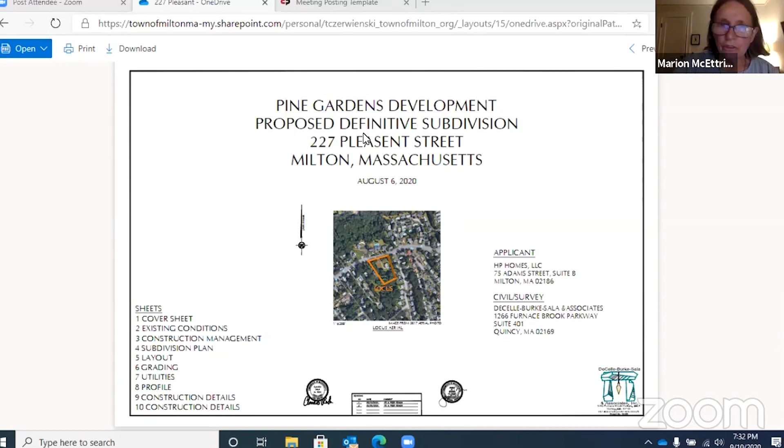So that was a very helpful summary, and it's been very helpful working with Tim Czerwienski since he came on board in August, going through some details for this project and trying to figure out how to address them and not have them left hanging at the hearing. I have to say, as an applicant's attorney, that was a really helpful process for me, so I appreciate that.

So this is a 5-lot subdivision proposal, 227 Pleasant Street. It's on a parcel of approximately 69,000 square feet in a Residence C district. There was a house and outbuildings on the parcel. We had to go to the Historic Commission to get permission to take the house down. They determined that it was not preferably preserved, although the age of the house was about 1920, and the same for the outbuildings. So we're working with a site that will be cleared of buildings.

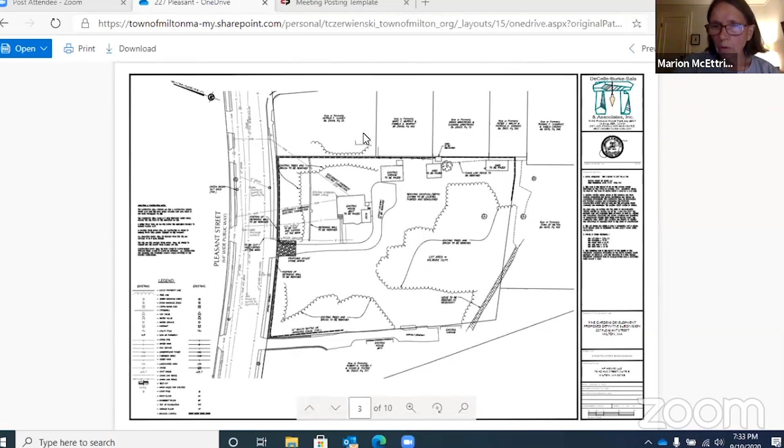We also, after our preliminary review in March, had recommendations from the planning board, recommendations from neighbors, and recommendations from the engineering department. So all of those recommendations have been incorporated into the plan that you're going to be looking at tonight. In addition, there was a peer review process for the stormwater management plan. That went on for quite a long time, it was very detailed. Changes were made, more excavations were done on the site. And at this point, with the work of the two engineers, I think it's a plan that you should feel some confidence in.

So what I have filed in August is the subdivision plan application with a narrative. My narrative explains what we have done to change this proposal since last March, as well as exhibits: the cut sheets, landscaping plans for each lot and for the perimeter of the development, an existing tree plan showing what trees are coming down. The town's tree advisory committee weighed in on the trees, even though it's not a public way, I asked them to look at the trees.

The final design for the one street light that we're proposing.

A document called a Declaration of Trust establishes the homeowners association that will manage the private way, the private sewer, and particularly the drainage system, because there will be a number of drainage structures that will have to be maintained on this site, and also the fencing around the exterior of the development.

I also filed a construction management plan that had been edited and improved since March. There had been some suggestions or recommendations from the planning board, and we incorporated those. And then of course, the 10-page site plan that you're looking at right now.

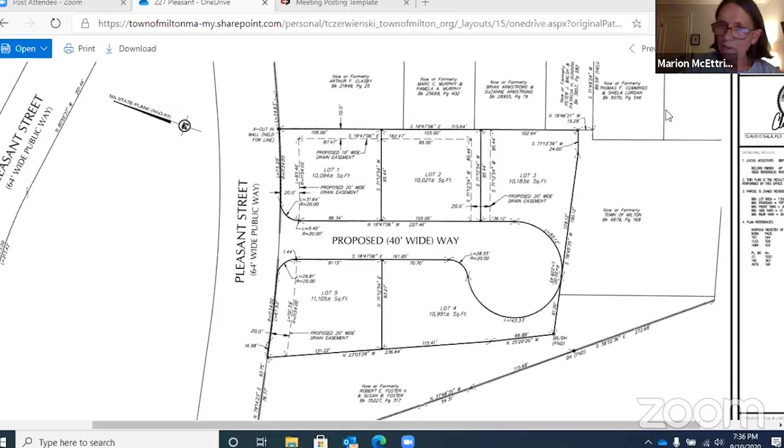Lot layout, roadway, and sidewalk dimensions so far remain unchanged. There are still 5 lots, each about 10,000 square feet, and there's a short private way, which you can see on this plan, ending in a cul-de-sac. There's a sidewalk on one side. We decided to terminate it before the cul-de-sac after the preliminary review.

That was basically to eliminate additional impervious surface that was deemed not necessary. We did explain at the preliminary hearing that lots in the front corners would use house designs with porches and other design features, so there would be an interesting view of each house from the street. Houses will be built individually for individual buyers by this developer, so they could be a variety of designs, and I'll be addressing that a bit later when we talk about energy efficiency as well.

We did modify site grading in order to allow the retaining walls to be lower. And we have plans to use all of the existing granite on the site. It's still there, you can see it in piles if you drive by. That will be used in the retaining walls and could be used in the houses as well.

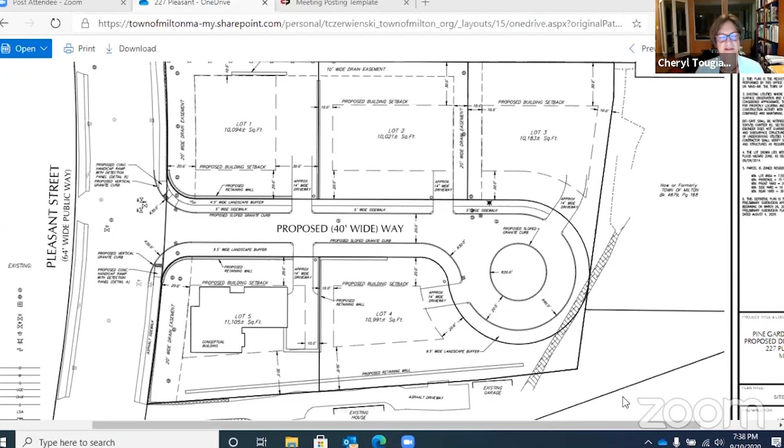From the perimeter of this development, the retaining walls will not be visible; they'll be at grade. From inside the lots, they will be visible, and the landscaping in the back of the lots will set off the walls. But they're going to be of natural stone and granite, and they will be attractive. They have also been moved back from the lot line so there isn't any chance that construction of the retaining walls will interfere with root structures in adjacent properties. That's something the planning board asked us to do.

Tim, can you advance that plan to the grading plan? I think it might be next.

So, Marion, there's still a lot of retaining wall here, so there's a very small amount of reduction, is that correct? Yeah, we didn't take away retaining walls, we moved them back from the lot lines. We had already designed this so that retaining walls from adjacent properties would not be visible, so they're not sticking up in the air as you look at this development. This isn't one of those developments where you drive by and see a huge concrete or stone wall that wasn't there before. But we did move them back because there was concern that the work on the wall might interfere with root structures in neighboring properties.

As far as the grading adjustments that may have been made, I would ask the engineer to address that, as I don't really have a detailed ability.

I don't have the ability to describe that well in summary, he might be better at doing that. If you want him to do that now, or no, I think I do have comments and discussion I'd like to do with the grading plan, but I think it would be best after you go through all of your comments. Okay, thank you.

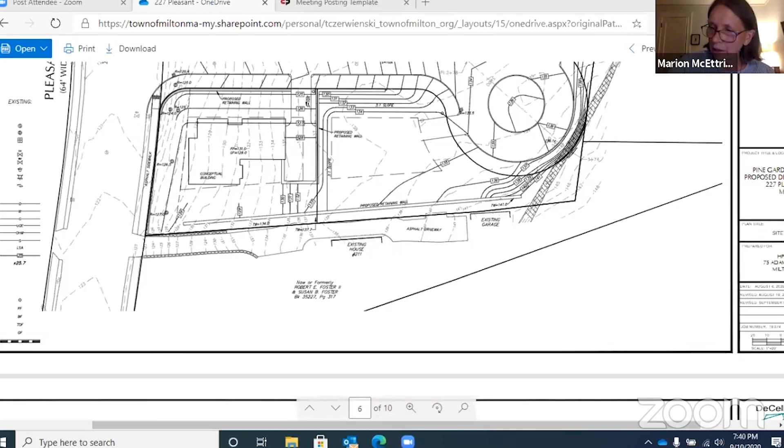As I said, I did have TAC look at the street trees. They were very happy with them, didn't have any problem. They told me that the street trees on Pleasant Street were kind of straggly looking, since it's a narrow tree lawn. So they've told us they'll see if there are any better trees that could be installed there, and they might come back and make a request to the developer. We'd be happy to hear that if they do come back and do that.

There is one street light proposed for this development, between lots 4 and 5, on the street between the two lots. I think it's at a 14-foot height. I provided specifications for the light, and the fixture itself, the bulb, is going to be the same fixture that the town uses in its street lights, which is highly energy efficient. Once it's installed, it probably won't have to be replaced for as much as 20 years. The design is in the exhibits. If anyone is interested in that, we can bring it up.

I want to talk a little bit about energy efficiency and energy sources, because a question was asked about that at the hearing in March. This development will be served by electric lines and by a gas line, but each lot is going to be developed for an individual owner. That's one of the features of a development that is considered potentially more energy efficient, simply because a developer can design the house as the owner wants it.

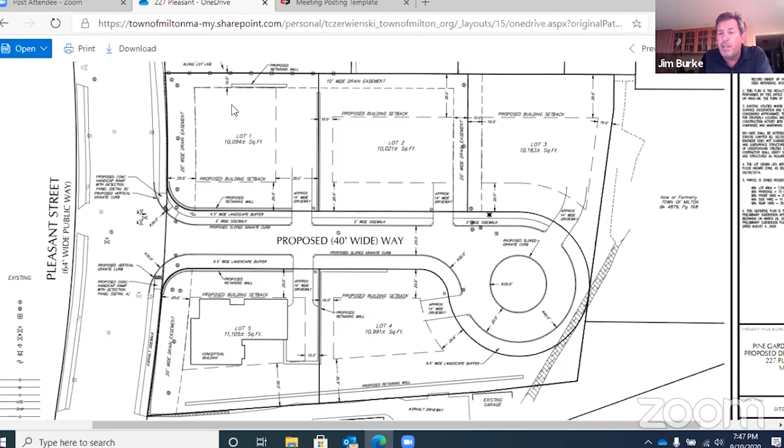So that's a quick summary of the changes we incorporated into our final definitive subdivision application. If Jim Burke is interested - I don't know, you may have questions for me - but then I would ask that Jim Burke discuss the drainage plan. Why don't we have Jim speak about the drainage plan, and then we can go to the board for all questions. All right, this is Jim Burke.

Can you hear me okay? Yes, thank you. Good evening, everyone. I'll be brief. The stormwater management system really hasn't changed that much since the last time you saw it. There was some great input from Jeff Kane, the peer review engineer, that tightened this whole thing up.

The drainage consists of catch basins - there'll be 4 catch basins collecting the runoff for the development and conveying it to 3 separate water quality tanks, Downstream Defenders, to assist in removing total suspended solids and meeting the water quality requirements in the Massachusetts stormwater standards. To buffer the peak flows, we have 3 underground detention tanks that are pretty significant in size: 10 feet wide, 6 feet deep, with one 90 feet long and two others 76 feet long. The treated stormwater will flow into those tanks and be released to a water control structure down at, I believe, the easterly corner of the development, releasing the runoff to Pleasant Street with a reduction in flow from the site and improved water quality standards provided by the deep sump structures.

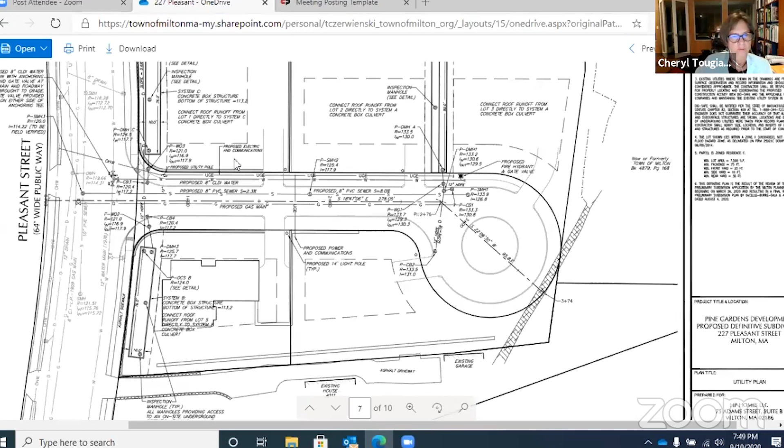Thank you. So if that concludes the presentation, I think I'd like to open it up to the board. Everybody should be - all of the board members are unmuted unless you have yourself muted. So I don't know who would like to kick us off. Cheryl, do you want to kick us off? I think you said you had some questions already baked.

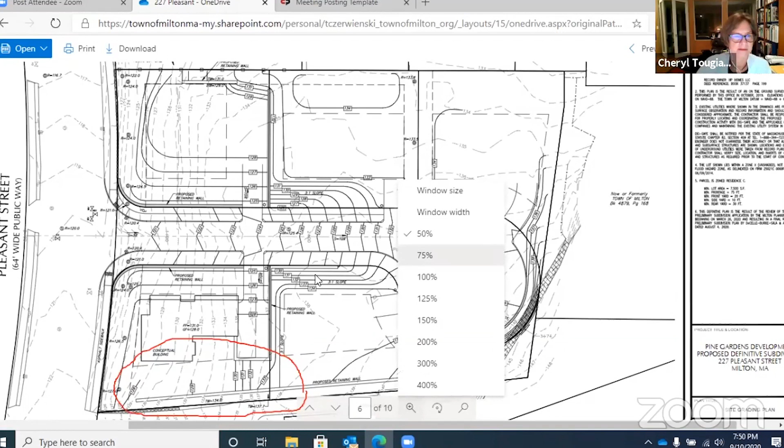Right, yeah. If you could go to the grading plan. No, okay, all right, so I'm going to just talk about the grading a little bit. If we could, Tim, zoom into this section, please.

Cheryl, the Zoom is not as intuitive as I would like it to be. Am I in the right ballpark? Yeah, that's fine.

I wanted to talk a little bit about what's happening with the grading plan here, and how we provided some feedback back in March about whether the grading could be looked at differently. The property slopes up from Pleasant Street pretty steeply in front, then less steeply here. I understand the grading for roadways needs to work according to standards, and there's a waiver for this section, which is steeper.

What's happening here is this grade of like 128 is gradually going up, but right here it's getting pushed back. So from here to here, that grade is getting cut back to make this fairly level. And what that does is necessitate this retaining wall, which I think is necessitated by the roadway. And then we have another retaining wall here.

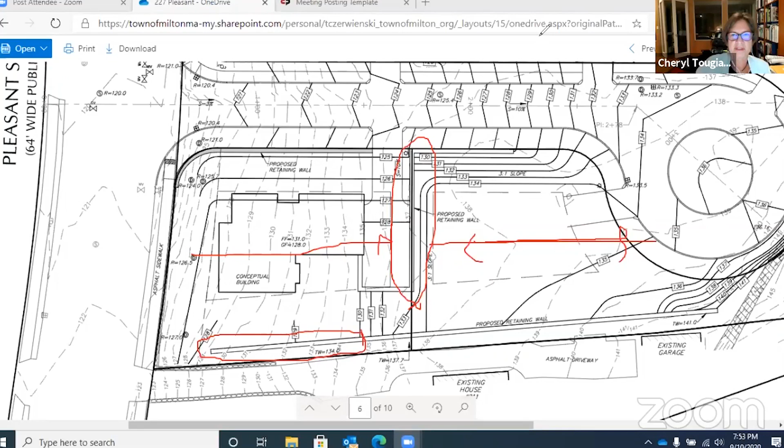It seems a very aggressive topographic change to me. We have a subdivision we approved a few years ago on Highland, where this also has some topographic change, and the new houses and grading there have sort of blended in. I'm feeling like this is going to look like somebody came in and terraced this property, put these walls in, and look very unnatural. I expressed these concerns back in March, and I don't really see any change to that in what's proposed here.

If you could scroll up towards the top now, Tim, to the other side of the road. Again, the retaining wall here, the flat pad, the retaining wall here, the flat pad. So we have this terrace look now when we're looking up the street from Pleasant. It's unlike anything else I can think of along Pleasant Street or perhaps other places in Milton.

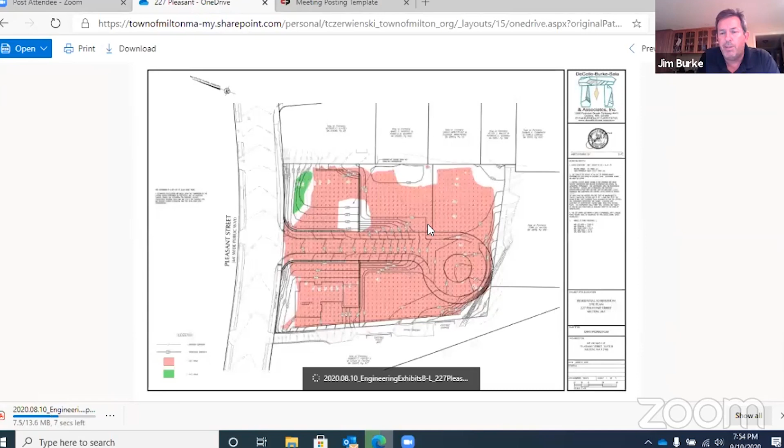I think part of it is probably required, but I don't think all of it's required. So I'd like Jim to talk about that. Also, the cut and fill plan that we were provided was pretty small, and I'd like that plan to be called up and Jim to address it relative to my comments here with these retaining walls.

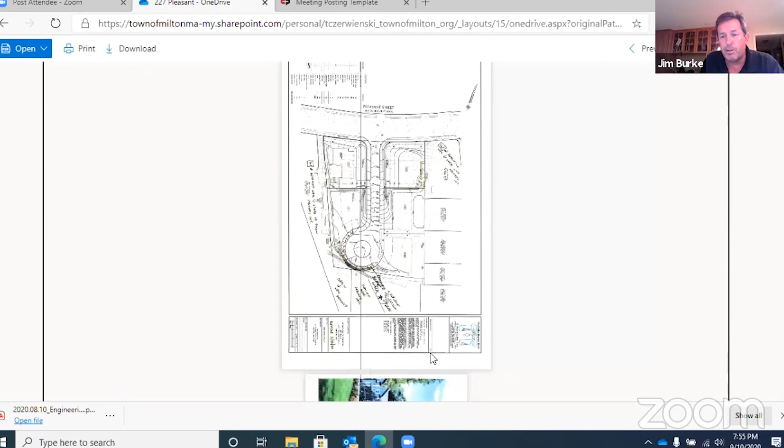I guess you're right, Cheryl, with regards to the retaining walls and what they represent. As the street is cut into that slope, there's really not much we can do with those, since we're asking for waivers to go from 3 to 10. And they're not huge - I believe they're like 4 feet at the highest, for those retaining walls to allow the street to be constructed.

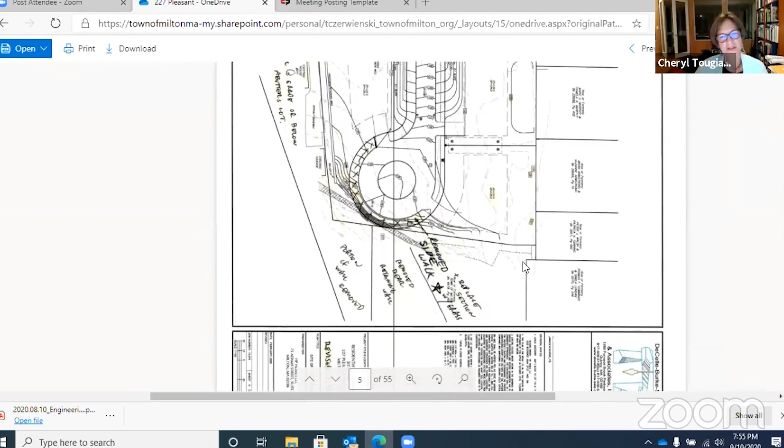As far as the internal retaining walls that provide the platforms for each individual lot, it's really kind of a factor of the architectural homes being proposed for the lot, with the porches and the like. The garages are real close to the same elevation as the finished floor. Once you establish a flat elevation for a single family home, it really kind of dictates what the topography for that particular lot needs to be.

Jim, can I interrupt you on that point for a second, please? Sure. We spent a lot of time on this board reviewing the plans for Wolcott Woods, and on that property there's extensive topographic change. We do have retaining walls there, but they don't have this kind of terrace look because they're not making these flat platforms. They're using the topography also, and the architecture can work with the topography - it doesn't require it to be flat.

I just want to point out that it's not necessary to make it flat in order to have the architecture work. It's a different style of architecture. If the homes were graded differently, you could have more exposed massing on the front along Pleasant Street, blending into the grade. So you'd have a lower grade along Pleasant Street and a higher grade further back into the lot, giving more exposure to meet the grade.

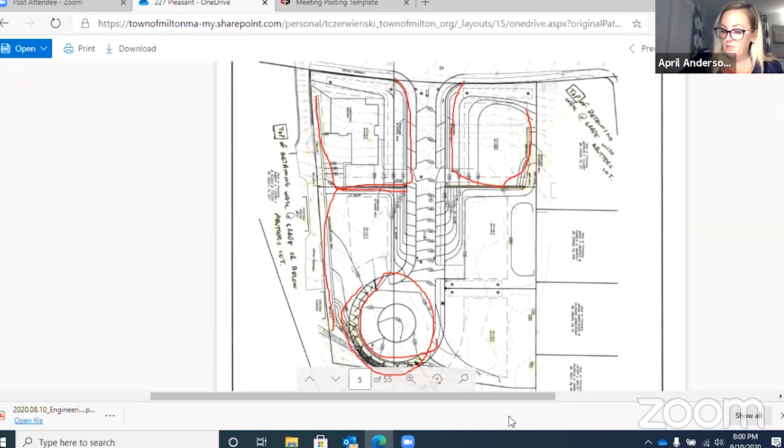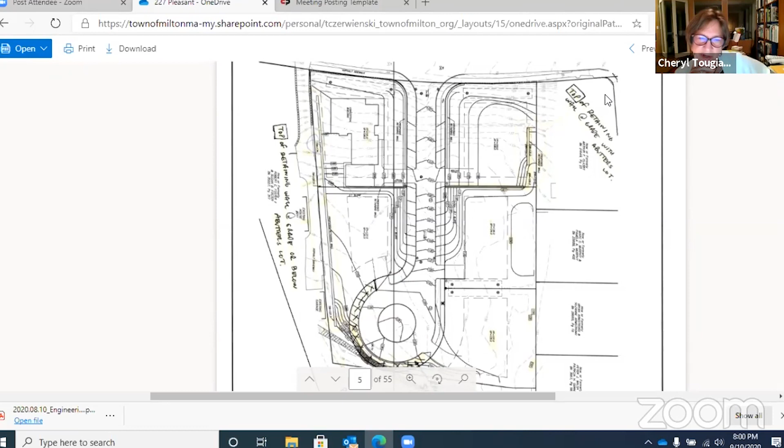No, but I think if there were a 3-dimensional drawing, when you're coming along here seeing wall like that, it's just a very different kind of look than building things into the landscape. And this is cut in as well—there's all of this cut in here, and this is a very big circle. So there are design choices made here that I call aggressive, because they're big changes to the topography, to the lay of the land.

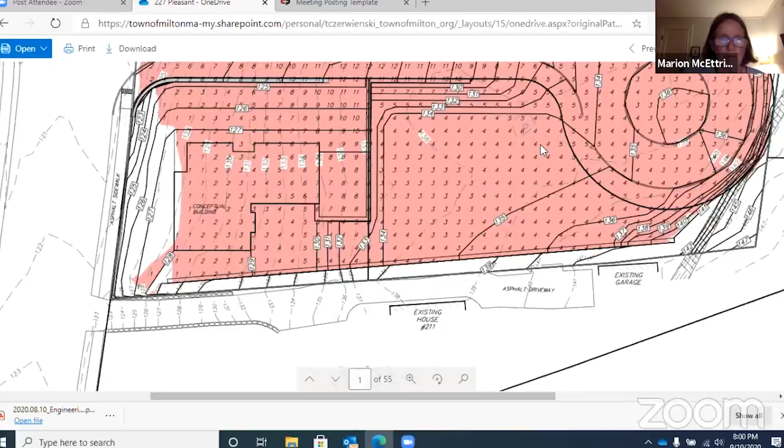And it doesn't have to be that way—you can still have 5 lots to build 5 houses on and put the road in, and that would be more visually consistent with the neighborhood. That's what concerns me. I understand that part, yeah. Okay, thank you. Not that I'm working on the design myself, but I understand what you're talking about.

I think if you, Tim, could pull up that cut fill analysis, I'd like to have Jim point out to us, because that might help demonstrate what I'm pointing out on the grading plan. Marion, do you recall what page that's on in the exhibits? It's probably the second exhibit, before the landscaping, back before the trees—one of the first drawings. There we go, okay.

So Jim, if I understand that plan correctly, those numbers indicate how much soil is being removed. Correct—the red represents the cut, there's 8,500 yards coming off this site. So if we talk about cut fill balance, there is none—it's all cut and no fill, and that's my point too. You drive down the street and you're going to see somebody cut a rectangle out here and put houses in, instead of finding a way to put 5 houses in that works with the landscape.

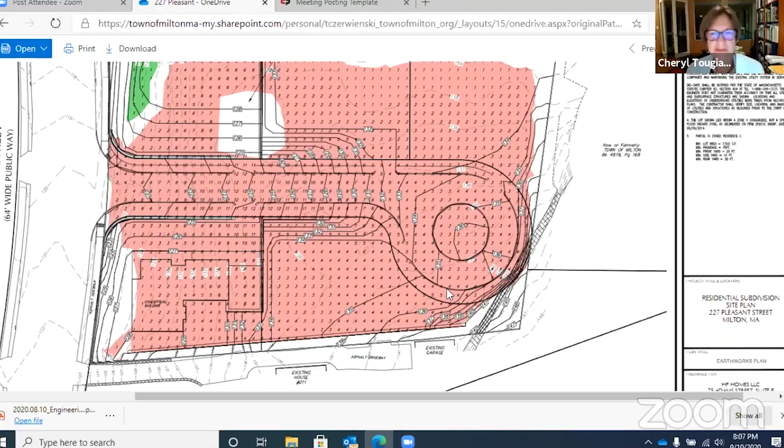Well, rather than try to design it now, I would really like for you to take a better stab at doing what I requested back in March and what I'm requesting again tonight, which is not such an aggressive terrace look to this site.

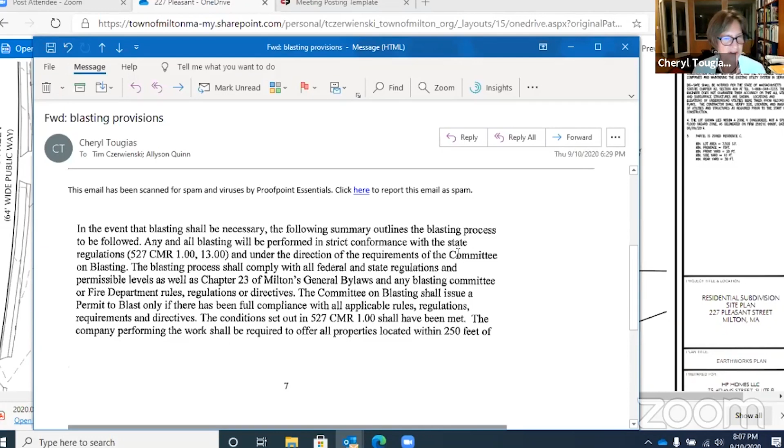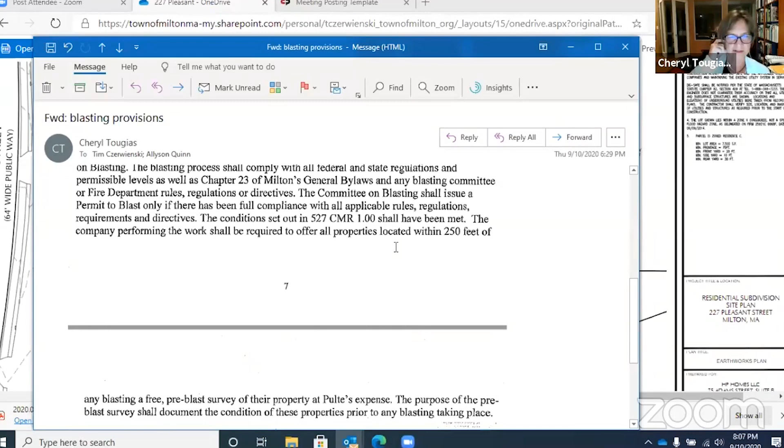The lots themselves are 10,000 square feet, not a significant size. So as soon as you put a house on this particular lot, what you're asking is that the foundation acts as retaining walls for the slope, for the existing grade of the parcel, which can be done—it's just a different style of design, and I can certainly provide that.

Well, that's one of five people on this board's opinion. We can see what others think, but I do have some pretty serious concerns about what this might look like.

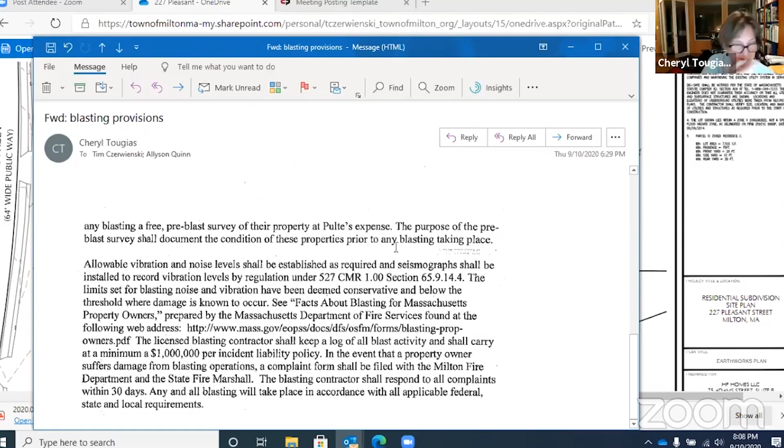Hey, Cheryl, do you have other questions or comments? Just on a totally different level of discussion would be the construction management plan. There's nothing in it related to blasting.

When we did the Pulte construction management plan, we had a couple of paragraphs related to blasting, and I snipped those and sent them to Tim and Allyson, which looks like they've got here. I would just like for Marion and the team to take a look at that and consider some revisions picking up on some of those things. They had a lot of rock up there.

And there's this section and another section too, if you scroll. The town has a blasting bylaw, and that should be referenced. Did you reference that in your construction management plan? There's no mention of blasting at all in this construction management plan.

I think it's fine to put it in, I'm just asking whether we can put the town's reference in as well. Yeah, it's here, if you scroll back up a little bit, it does reference the town's chapter 23. But it also references state law.

I think it's important to put it there, because it's the place that the people doing the work will be looking, rather than thinking 'oh yeah, there's a state law I should have thought about' when I did that work. It should be in there. Okay, so April, those were my two thoughts, a couple of thoughts from Tim.

So then my larger question goes back to this grading issue - I thought I heard you say that houses are only going to be built as they are sold. So depending on what happens, that could be several years down the line before you finally finish all 5 houses. Right, so there's nothing in this that says these houses have to be designed the way you have proposed.

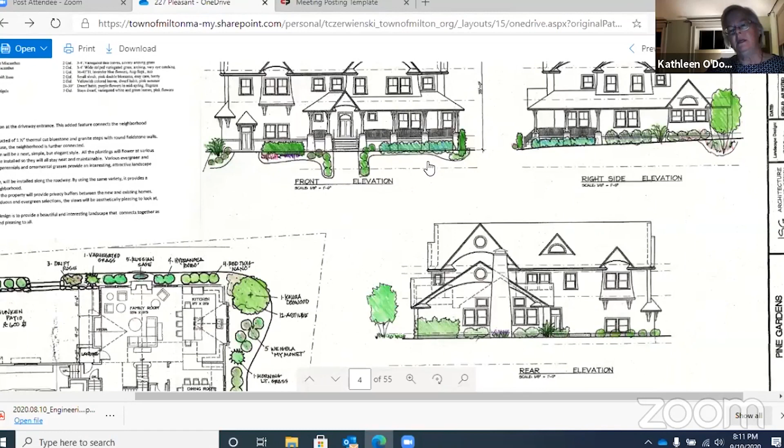Is the idea that you're going to grade every site and have it construction ready, or are you only going to do the grading as you sell a house? Well, first of all, this developer is building the houses. He's building them with features as requested by buyers, but he has an architect. He's not selling the lots to a new owner who then goes out and gets their own architect and designs their own house. That isn't what's happening here.

But in terms of how much preparation each lot would take, I would appreciate it if Kyle Harnish, or the engineer, would address that, because I don't know exactly what the order is, but I would assume the lots are prepared to be ready to build a house, and then they're ready to sell or put under agreement with the buyer according to the plan they agree will be built.

Well, it's sort of going back to this whole grading issue where you're moving dirt all over the place, holding onto rocks and not holding onto rocks and all that sort of stuff. If it's all going to be happening pretty quickly, or you build one house and then the market takes a dive and it takes 5 more years before you build house number 2 - I can't believe you would have spent the money to build the entire roadway, the cul-de-sac, the sidewalk, and graded all those sites for stuff that you haven't sold yet.

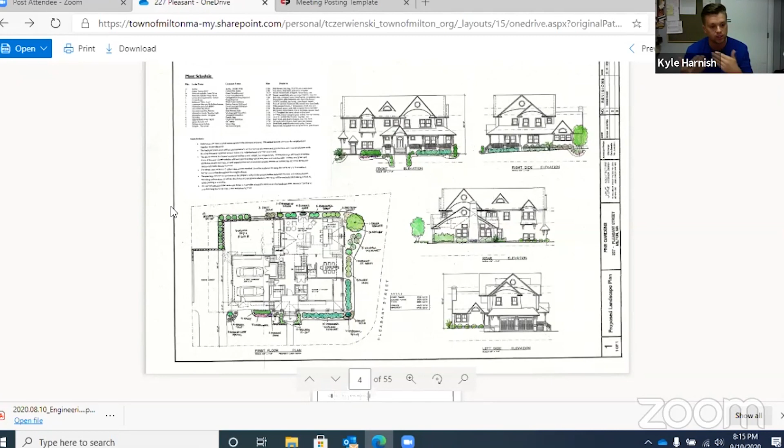So I think what Marion was trying to explain is that we are going to give an option, as we move through the project, for clients to secure with me a design build package, and I can add some modifications to the specific house. I have two or three designs in mind for how I've been planning to do this development, and it's a matter of financial decision for myself and what makes most sense. But my intention is to start with the road, which I have to do, and I have to address all the drainage, bring the utility lines, do everything associated with the lot.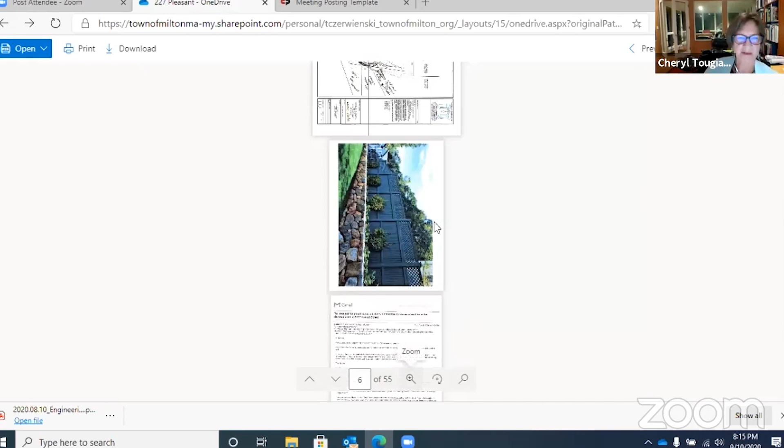And I'm going to start initially on the first house. I can go ahead and build all five houses if that's what I decide to do at that point financially, but I do have the option to perhaps pre-construction sell some of these houses so clients can have some input on finishes. I don't intend to get into the process of letting each client individually design their home completely. I am going to give them a set of standards for which we can work in. So that's kind of my direction on how I want to go about this. Thank you.

April, I just like one other thing, if you don't mind, that I mentioned, but I would just like some follow-up on, and that's that question of the code requirement on the guardrail for those retaining walls. I'd like the design team to come back and let us know whether, in fact, what I suspect would be required there would be.

So our intention, I can speak on at least on the side lots that go all the way up that separate our property from the folks on Pleasant Street and the folks on Dean Road. The intention there was to put a fence around the entire perimeter of the property. So that would sit on top of the retaining wall. I believe there's an image of it somewhere, a sketch or an image of what we were proposing.

In between the lots that you're saying would need or require a guardrail, I would likely do something similar in a fence style, perhaps a stockade fence or something sufficient for the code requirement. So can those fences be added to the plan? The extent of the fences and their locations, can that be added to the plan?

I pressed very hard to get the grass in well over a year ago. And Tim is going to show you a couple of slides just to bring you up to speed on where we are. First visit, December of '17.

When we first met on this site, we realized that the storm drainage was going off in a bunch of different directions. Those little blue hen scratchings there, it was going up to the upper left, it was going to the upper right, literally flowing down. The plan wasn't working, and through what I understand was a rather lengthy court battle that I had nothing to do with, I guess they gave me the honor of helping you solve this problem.

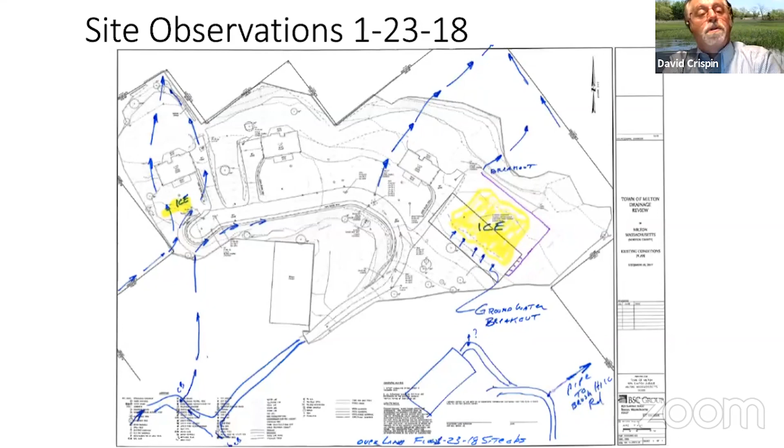So we worked pretty diligently with their engineer, Fred Geisel, and guided him through what we thought would be a reasonable solution. And the next sketch, and these have been in the archives for a little while. If you want to flip to the next one, Tim.

He's quick with the trigger. Can you back up, Tim? There we are. This was, and I don't want you to pay a lot of attention to the details, but this was what we suggested to their engineer, and there was a whole bunch of dig here, move here, fix this, do that. And lo and behold, they finally put a plan together.

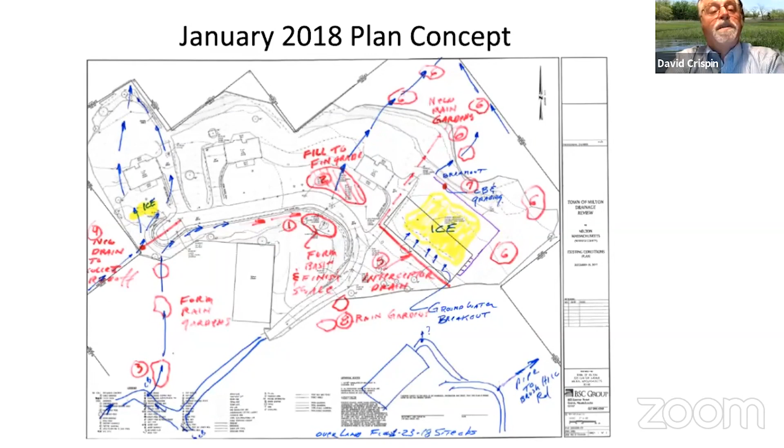We all agreed on a plan. This was close to 2 years ago, and they've implemented the plan. And the good news is I haven't heard any complaints or seen water flowing basically off the site in well over a year. And I know we've had some very good rainstorms.

That being said, give me the next slide for a second. And I've only got 8 pictures here for you, so I'm not going to hammer you. We made a number of requests. Japanese knotweed is all over the place. We suggested that they do an invasive species management plan. We have not seen that.

If this board tells me to drop that issue, we can drop that issue, but I believe it's going to be important, at least to the condo owners, when the developer walks away, because Japanese knotweed, even today, I did walk the site, is popping up everywhere.

Wow, that's not good. May I ask a question, Mr. Crispin? Sure. Is that going to impact the stormwater system? I do not believe it will. And that's why I'm saying if the board says this is not important, then this is not important. But watching this get built, I'll show you a picture at the end of why I think part of this is important.

Okay, we've been asking for an as-built plan. Part of this meeting has resulted in one positive thing. I've gotten a call from the developer. I've gotten a call from the developer's engineer. I've got a copy of an as-built plan today. I've got a response to my letter that I've been waiting for well over 6 months for.

So I think I'm at the point where I can say, okay, let's meet on site and walk this thing through and wrap this up. We're not, they're at the second and goal, as far as if I was to use a football term. They're really close here.

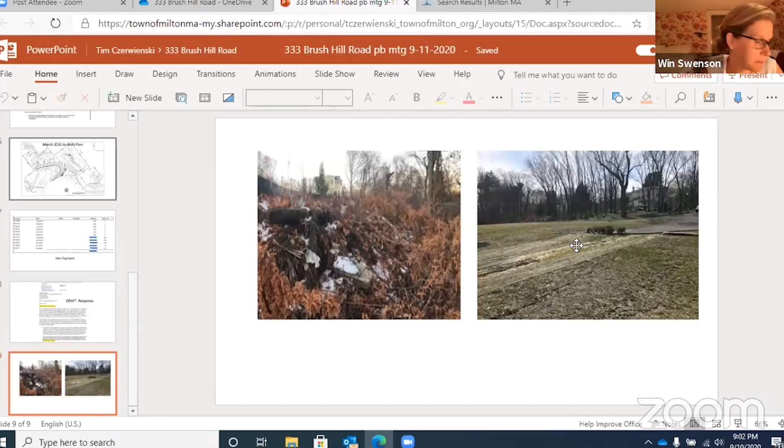Anybody else have any comments on this? Yes, Debbie. I see the document that showed the tree plan. I spent a significant amount of time walking the site with all the different parties, and I just wanted to get an update on the trees.

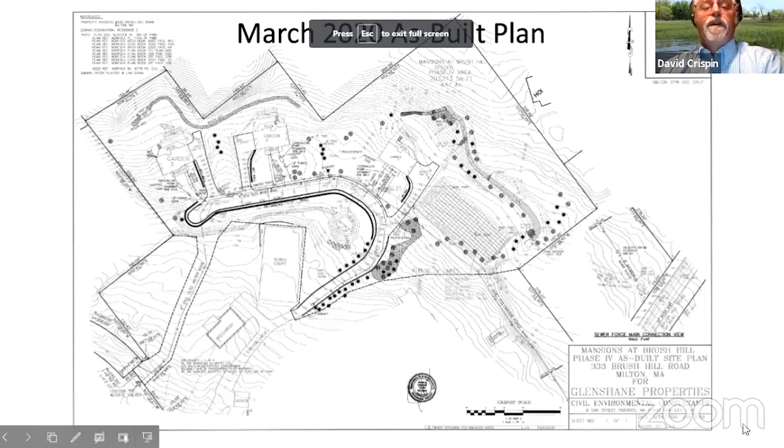Yeah, this is the as-built plan that they put together last March. It took a couple of months to get to me because it came through the building inspector's office. But they didn't identify species. I'm not sure they actually surveyed these locations or just sketched them on there. At that point, I was basically shutting down for non-payment, so I was reluctant to send my landscape architect out there to verify species and size and all of that.

Yeah, as I recall, there were going to be some more trees to the back left. And over to the right, I was concerned about some trees dying. They looked like they were going to die. So we had a plan that the developer would have to replace those before they left if they did in fact die. I can tell you they did die, and I don't know if they've been replaced one for one at this point or not.

Mr. Crispin, did your comments mean to imply that you do intend to send a landscape architect out at some point in the future? I think as soon as we're confident that payment's going to be made, yes. Okay, so Denny, would you want to join? Sure, yeah, I would like to do that.

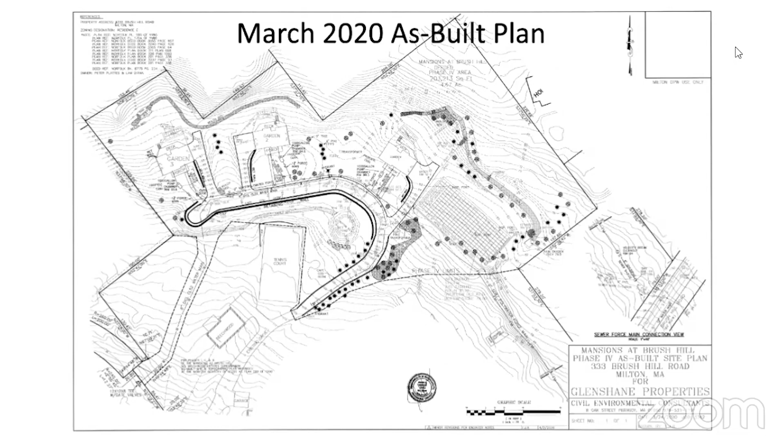There were many things about the plan as they were implementing it that were different. So the design that had been approved, and the stormwater that had been peer reviewed, was no longer going to work because of these changes and the fact that it had been clear cut, and we had been very specific about not clear cutting it. So it had to have a redesign, and Mr. Crispin assisted, and some of his earlier slides showed his analysis. The planning board really got involved in this because the neighbors alerted us to the fact that this disagreement between the parties was having significant impact on them. The board worked quite extensively to help come to some kind of solution that would move this along. And that's where the settlement agreement, the modified approval, came from.

Thank you very much, Cheryl, that's exactly what I was looking for. My primary concern here is getting Dave paid, so I just want to have all the information there. I was on the board when this came to us for approval of those three.

And so I too, like Denny, have been frustrated over the last several years because I raised the issues like I have been all along on grading, on limits of work, on not having trees removed. And that's why I think Denny and I both harp on these things on every application, because we've seen what happens if it's just left and not done properly. You can't assume that it's going to be done properly.

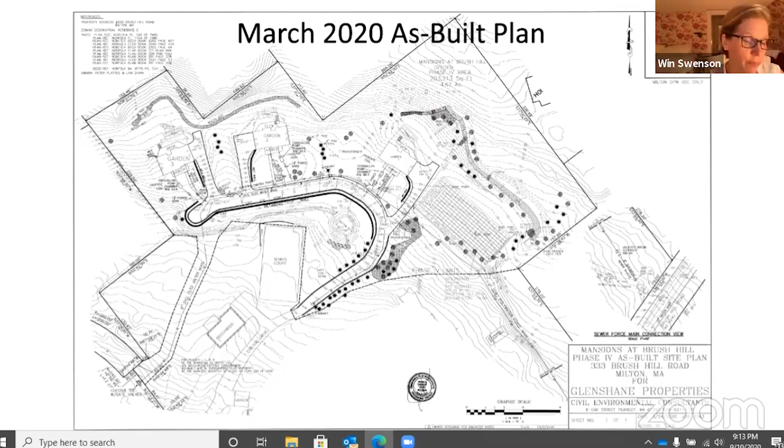If I could add to that, they didn't just move one of the buildings slightly. They moved it something like 50 feet, and, thanks to Dave Crispin, who was able to impressively look over Google Earth shots of trees, we assessed that they took out something like 50 trees outside of the tree management plan. And it's amazing the impact that those two things had on the stormwater system, making it practically useless for the neighbors behind the two properties in the back there.

But oh my goodness, we learned a lot on this project about the value of trees and vegetation. When you clear cut a property like this, it has incredibly bad effects on the abutters' water issues. And even adding to that, Dan, I think we learned a lot about process, and that's why we're going through these process improvements, engaging every department head in advance of every application, and getting all the comments either in writing directly from them, or memorializing them in these memos, so that we have something to look back on, because in this particular application, we didn't have a lot of background information on what the discussion was or what had taken place.

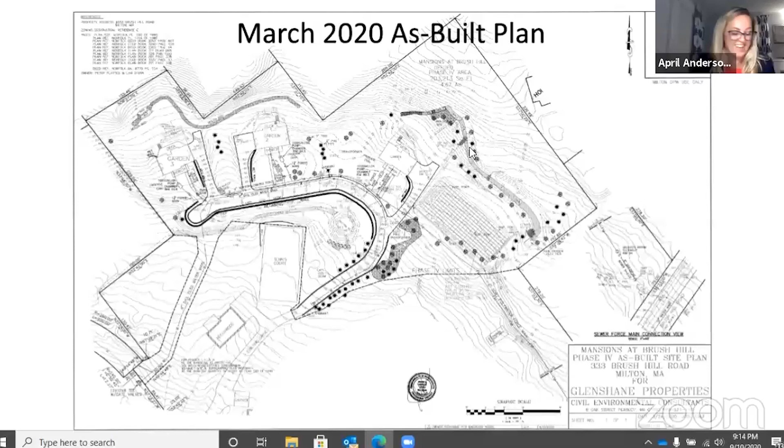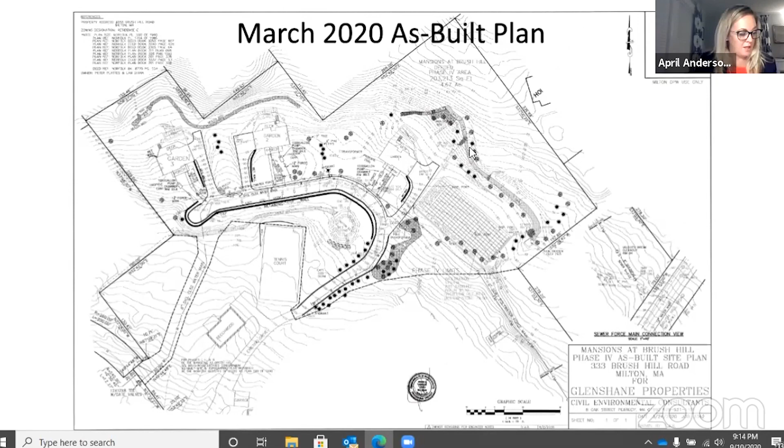So I think it's informed our process too. It was a traumatic experience, probably the most traumatic experience for me, so that's why I'm so thankful to Mr. Crispin for stepping in for us. That's why I'm adamant to see that you get compensated for your time and efforts on our behalf, and that all of your recommendations be implemented, because until you joined our team, we were making no progress. So we very much value your input, and we thank you on behalf of the abutters, the community at large, the condo association, and everybody else you've been helping. Thank you very much.

I hate to make light of this, but did you ever hear about the guy who asked, why are you pulling that rope? The question is, do you ever try pushing one? That's what this job has been like. I hope that doesn't mean you'll never work with us again.

Now, in the interest of time, thank you very much. We're going to move on to Walcott Woods, the de minimis change request. Tim, if you would please prep us for this discussion.

Yeah, so again, thank you, Dave. If Dave is still here, I think I might be gone - I'll touch base with him on Monday and figure out what our next step is there. Sorry, I'm trying to get out of full screen mode over here.

So we had gotten a request from Northland Development, the developer of the Walcott Woods project, regarding what they hope the planning board will determine to be a de minimis change to the configuration of a few of the housing units in one of the pods on the site. Let me bring up the document we were provided, and then I'll pass it off to Steve Gallagher, Northland's project manager on this one.

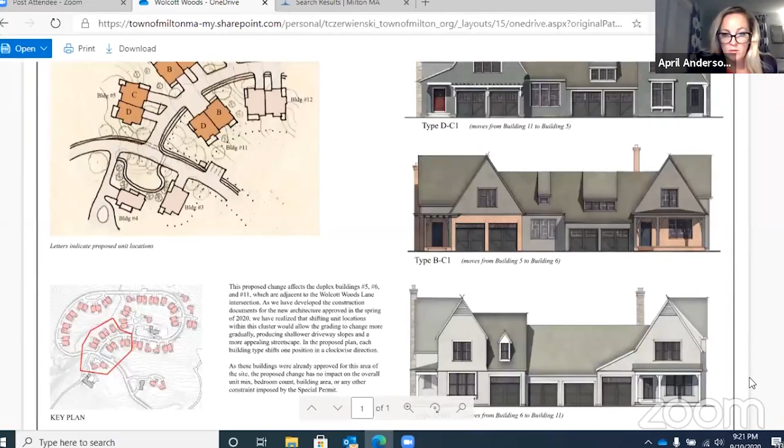So I have a question, Steve. The 3 buildings that we see here, this is the DC, the BC, and I can't see the label on the bottom, but I'm assuming that's DB. This is building 11, DB, is that if that's what you're asking? So that's what these three buildings would look like.

Yes, and those are the same, that's the same architecture that was approved already. So the buildings are the same buildings, it's just, frankly, I'm not sure how many people would even know which one was which without studying the original plans. But weren't all the garages next to each other?

Sorry, weren't there 4 garages in a row without those window structures in the center? Is that what you're saying is the change? In the 2019 special permit, there was different architecture, and the garage doors were a little prominent.

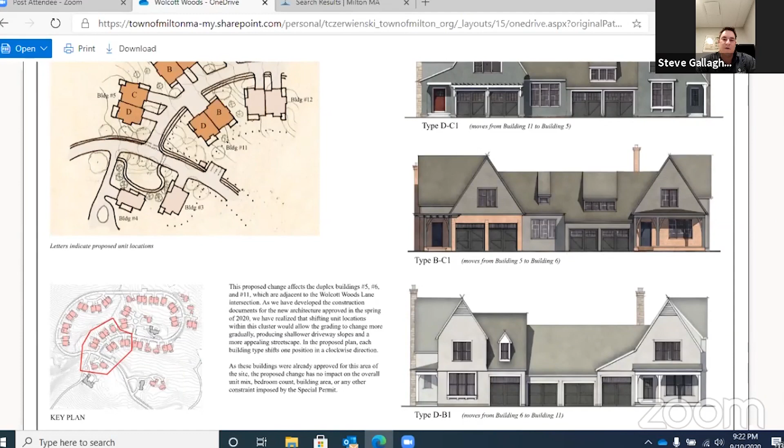As part of this thing this spring that we did, we were able to separate a lot of those. I think they were able to do some other things in the places where they couldn't, that changes the massing a little bit to soften the impact. In any duplex that has a C in it, which is a number of them, the garage doors are separated by the master bedroom in the C unit. So that's what those windows are that you see. But again, that's already been approved, and we're already planning to do it. It's just a question of what building is in what location, such that we can get the C units up on the uphill side.

So who has questions? I have a question. Sorry, Denny, did you have one first? Yep, I did.

Steve, you mentioned that the floor elevations didn't have to align now, which, thank you for picking up on the conversation earlier about working with the topography better with these things, because I feel there wasn't as robust a dialogue about how that can work. But here, these elevations are showing them at the same elevation, the floor elevations. So is it that D and C1 would actually shift up one or the other, or is it B and C1 that are all shifting a little bit? Because here they're all shown at the same elevation.

That's right. If you go around the site, it's a little different depending on the topography, but in many cases they are going to have split ridges. So whether it's 18 inches or a foot or something along those lines, depending on where it is, they are going to be different from each other.

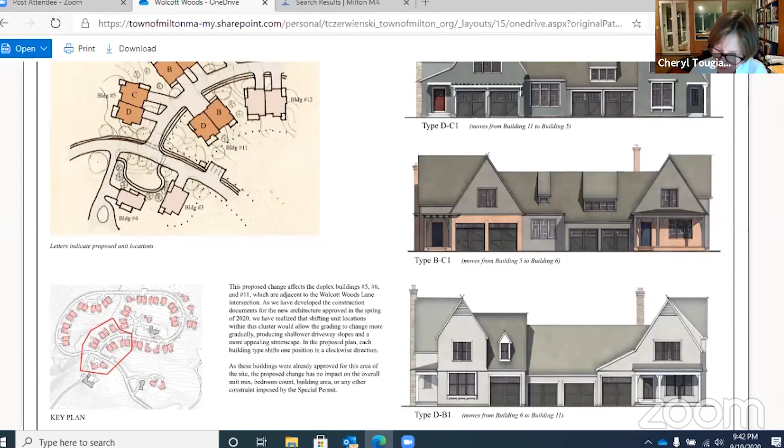I reached out to Alex Whiteside. He supported this when it was put on the ballot some 8 years ago or something like that, Kathleen. And he's supporting it this time around also. He thinks it provides resources to help achieve goals in communities where resources are tough to cobble together. So he's putting an endorsement comment together that'll probably be utilized by the committee as well. I just wanted to throw that out there if anybody's interested in talking to him about his thoughts, since he served on this board for many years.

So, members of the select board are individually endorsing. I individually am endorsing CPA. Just to give you a little background on what other committees are doing as well - the Historical Commission has taken it up. Stephen O'Donnell, the chair, is personally endorsing. And so there's outreach to a lot of other boards and committees as well as the planning board.

Go ahead, Rich. I agree, I don't see the relevance in the planning board meeting tonight to promote CPA. I mean, it's 9:42, and if we have other agenda items, I'd respectfully ask that we put this - it seems more like a commercial for a yes vote, and I'd rather have that at the end of the meeting. I'm just not interested in getting involved in the politics of it right now. I think there's a place for people to go ask their questions and get real answers on what does this mean to us, what does it mean to our taxes. I just don't think it's the planning board's purview to talk about taxes and spending or calculators. That's just not what we're here for.

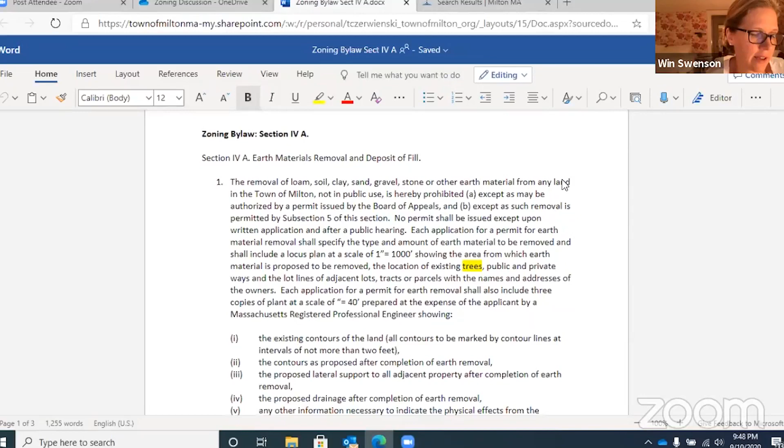And then I have three rules and regulations, which have to do with the rules and regulations that impact tree damage, where we see the most tree damage. I thought I should start there. In addition to that, I'll be meeting with the Shade Tree Committee next Thursday night to go over their ideas of a potential bylaw.

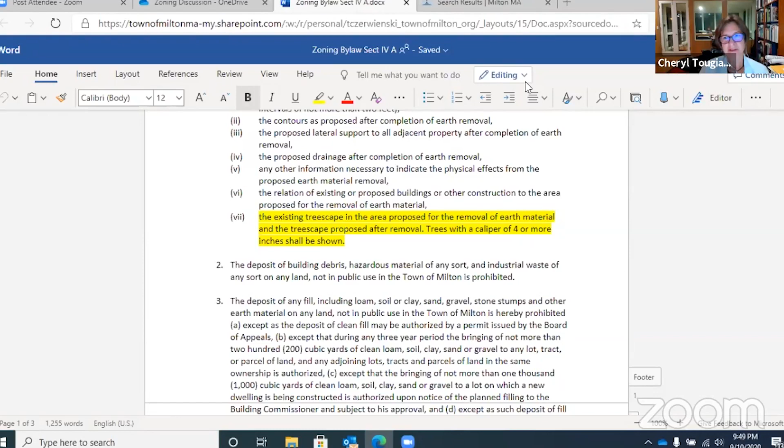But I took a step back. Instead of starting a whole new bylaw, I actually strategized with Alex Whiteside, who was very, very helpful in looking at it from a holistic perspective of what it is that I want, or we as a board want to see - less damage to trees during construction.

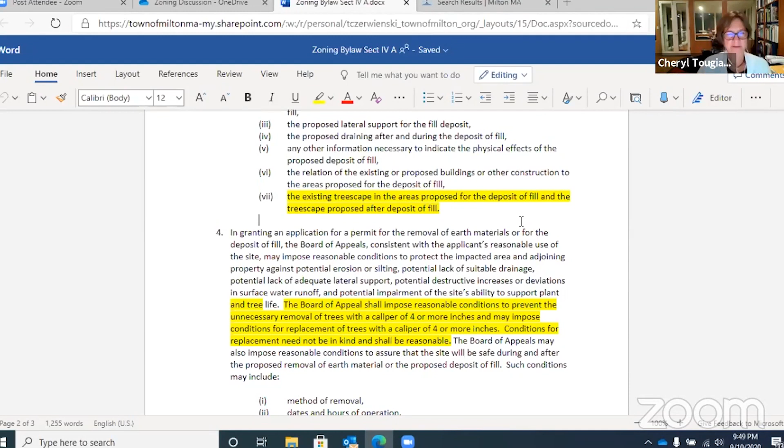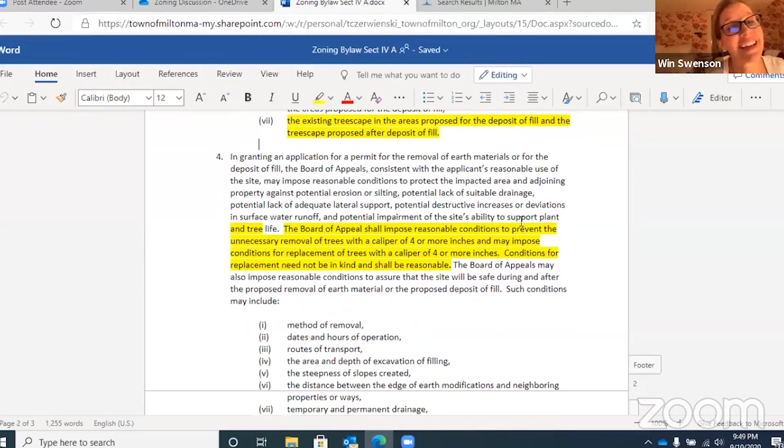Win, I'm sorry, I didn't get a chance to review what you sent yet, and I thank you for putting it together because we share an interest in this, so I will look at it and get you any feedback. But is this a new section of the bylaw? Just quickly, to understand this portion that's up here on the screen.

Sure. So what you see in yellow is added language to an existing bylaw. So this, and you'll probably recognize what I did in the regulations where I said we want to see trees on plans. That was a Cheryl Tougias request and reasonable.

The earth materials removal and deposit of fill - we wanted some continuity between the ZBA and the rules and regulations. The rules and regulations are of the planning board, and then this zoning bylaw - we kind of talked about it in two projects tonight. Actually, when you're clearing a site, we want people to be thinking about trees.

I reached out to John Leonard of the ZBA, provided him this language because it would fall under their authority. And he was very supportive of adding the suggested language. He said that this is long overdue. He said that the proposed tree protection amendments to this bylaw are clear, reasonable, and in the best interests of the town, abutting neighbors, and the environment.

And he elaborated to explain that a good number of projects have come before him, and the applicants and all of their experts just don't bring up trees. This gives them, the zoning board, the opportunity to bring up trees, in a way that's consistent with the way that we bring up trees. So he was very welcoming of this concept.

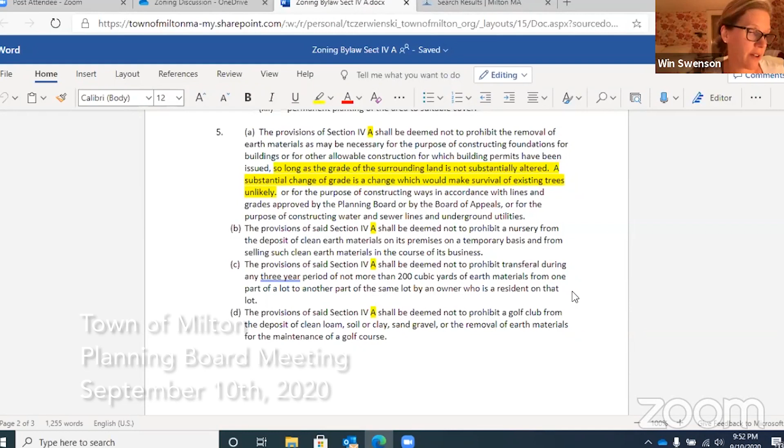And I thought it would be really helpful. It helps our planning staff, Tim and Allison and Julia, to be able to, when an applicant comes in, to say, here are Milton's - a tree-friendly town - and here are the guidelines for taking care of trees. The greatest damage that we see on the planning board, from what I see, is when tree roots get compacted, or roots get cut, or grade gets altered. And these guidelines all address those issues.

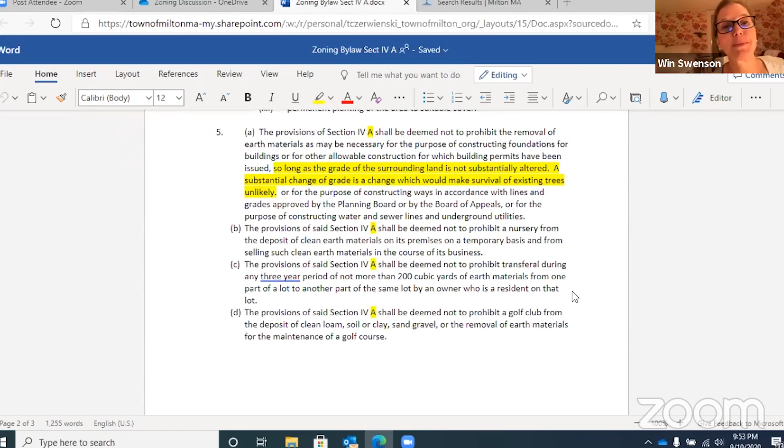So I'm sorry, I'm taking up far too much time at 10 o'clock at night. But that's sort of the background, and I'm ready to talk about it in detail once you've had a chance to read it.

So next time would be great. But I did get support from her. She agreed, saying these were the best guidelines she had ever seen, and we had a wonderful discussion.

In addition, the Shade Tree Advisory Committee chair got back to me and was very pleased, and she's sharing the language with the rest of the committee, inviting me to the next meeting. The chair of the Historic Commission, Steve O'Donnell, appreciated my sharing these documents and keeping him in the loop. He said this approach seemed very comprehensive. So I feel like we're off to a good start, let's keep the momentum going.

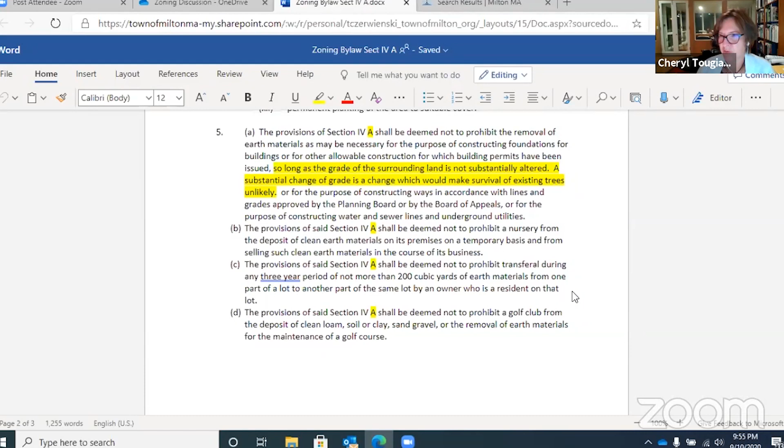April, I'd like to make a recommendation. Tim earlier said that one of his goals is to really help promote the housing production plan. There are a number of recommendations in that plan that require zoning revisions and require the action of this board. So if Tim could report to us -- I mean, we adopted it.

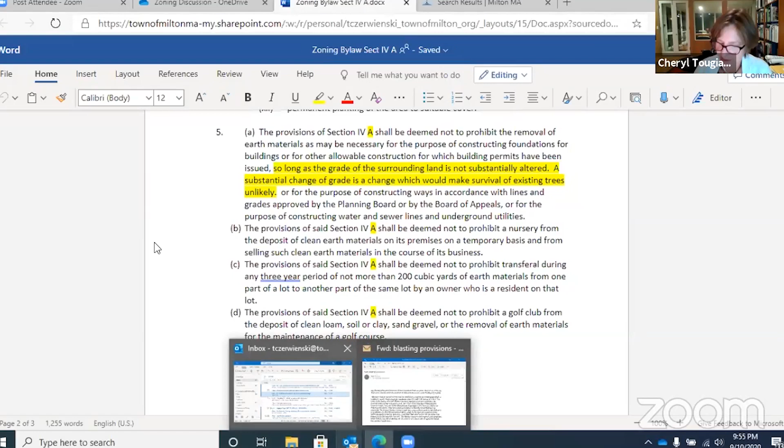We voted to adopt it, to support it, as we all remember. I did serve in the working group that worked with the consultant and the housing committee on that, and there are some really good things for us to consider. One I'll just throw out there is two-families. We have two-families scattered throughout, yet we make it very difficult to build any new two-families.

So is that something we should be looking at for maybe the spring, or maybe not even spring? But I would just like for us to help advance that. And the other thing I'd like to point out is that the master plan is 5 years since it was adopted.

Again, I've been our representative to that committee and chairing it for a long time. But one of the things we're going to do is step back a little bit and take stock of what's been accomplished. But there may be a few things in the plan that require planning board work as well, and I'd like to bring that back to us.

Sure. As you know, we had that running list of zoning initiatives that's been kept, and we check off some and add to it. So if we could bring that back up, take stock, and add these things to it. I'm especially interested in advancing East Milton's planning, and I think if that's a 40R district that comes out of that, or another overlay mixed use -- I know there's interest in people doing things in East Milton, and I just don't want us to miss the boat and say, gee, it's too bad we didn't do something sooner over here.